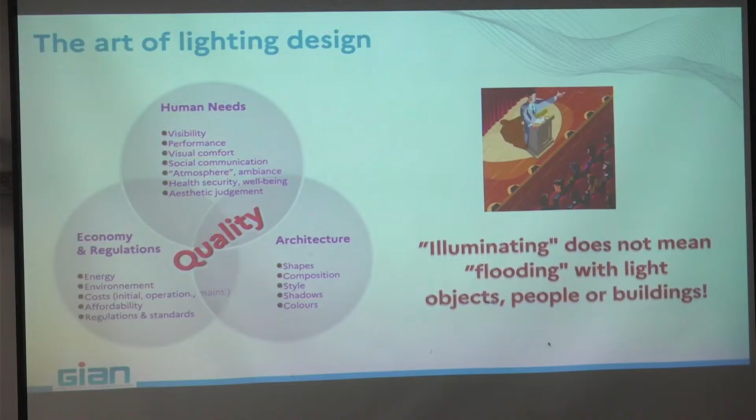It should be affordable and also take into account all the laws, regulations, standards, policies. Yesterday you had an overview, a very rapid overview of all that ecosystem.

And finally, this is interesting, of course, for people from architecture. And when I'm speaking here, architecture is not only building architectures, but it's also interior design. It's under the same title.

Then you have to take into account the shapes of the objects or buildings that you have to illuminate, the composition, what are the materials that are used to create those objects, the style. You will not illuminate the same way a Hindu temple as an Orthodox or Catholic church, or, I don't know, a modern building, okay?

Shadows. Shadow is very important to give the impression of volume. And finally, of course, colors, okay?

You see, really, a lighting designer, a real lighting designer has to take into account all that beyond the technology. The technology is what offers the possibility to create a lighting system to the designer.

Lighting strategies—we're speaking here about indoor, and we stay with indoor. There are different lighting strategies. You can see here two different spaces: one working space, another more relaxing space at home. But in both cases, if the needs are different, you have some general things that are the same.

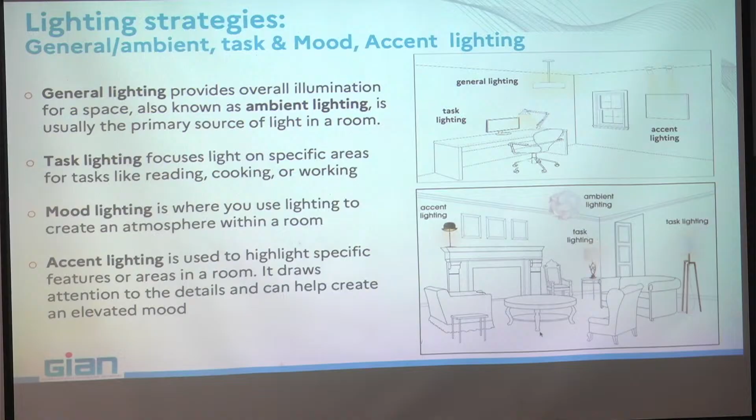Then you have mood lighting or accent lighting that is needed to highlight objects. Here is the case—this is accent lighting, it highlights the chimney here. This is the idea. And mood lighting, I don't have here any mood lighting, but this one can be considered as mood lighting or ambient lighting here. And here you have also accent lighting—you illuminate, for example, the whiteboard there in order to see it better.

Okay, this is the different types of lighting that you find in all spaces. And then there are different concepts for how to design the needed lighting.

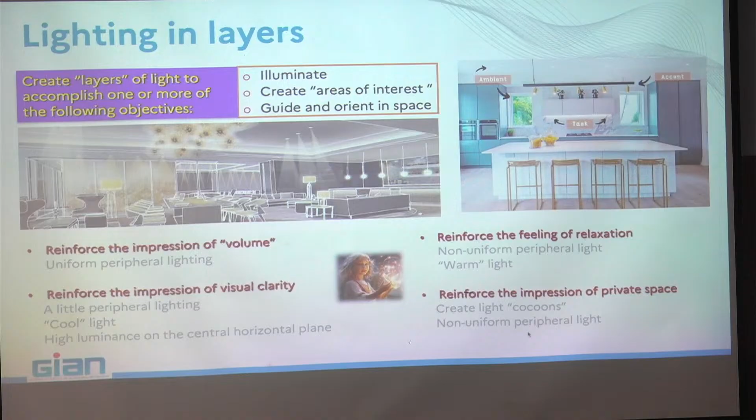This is an American concept, designing lighting in layers. I like that very much, but you have to be very careful because you can overspend energy if you don't take into account energy considerations. What is that? It's like an onion—create light up your space layer by layer.

There are three main objectives that the lighting system must take into account: illuminate, create areas of interest when necessary, and guide or orient in the space.

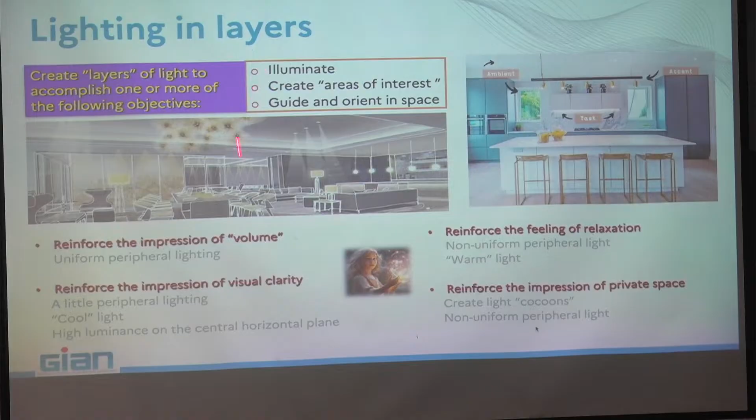You have those three functions, and in fact, when you want to light up this room, you decide what is the most important. You decide, for example, that illuminate, here is the case, is the most important. And then you start by designing the lighting to respond to all needs from general illumination.

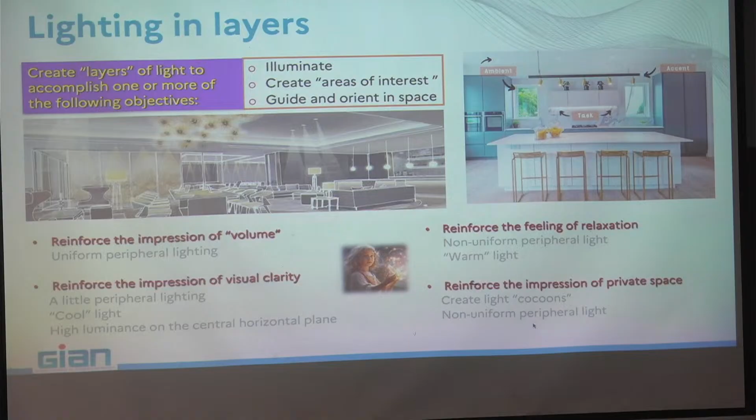Now, if you are in a corridor, there is a very important function beyond illuminate, which is to guide and orient in the space. Then you say the first layer is to light the corridor generally. Second important function to achieve is guide and orient, and then you have to add some additional lighting in order to obtain the orientation, or try to combine both. If you go to a retail store, of course, you need to illuminate.

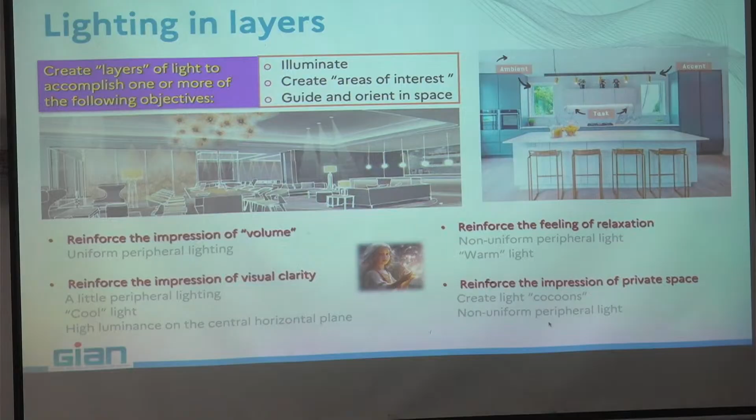This is one function, but you need to create a point of interest if you want to sell something specific, or in the opposite, if you want to sell everything, you need to avoid creating a point of interest. I will say maybe for a store, this one is maybe before illuminate. And also guide and orient in the space, of course, in that case is very important.

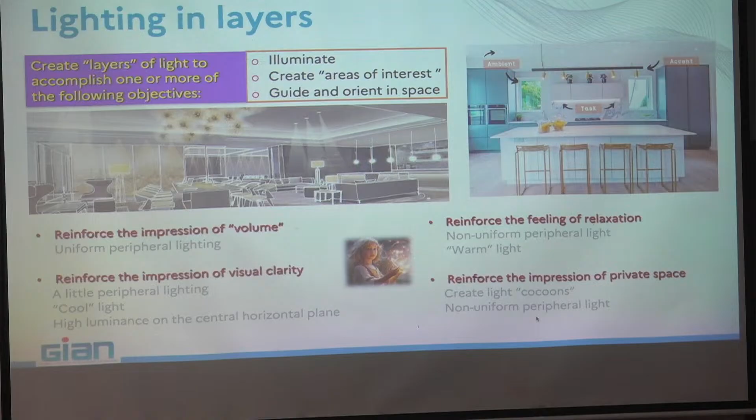You have to take each space and say, what is the priority that I want to give to each layer, and start by designing that layer, respecting all the constraints, and then add the next layers up to finalize your design. Why I said this can consume more energy: designing by layers, each time you add new lighting systems, new light sources, new power consumption.

If you don't take into account that, you can overspend. But the idea is you can combine and limit the new light sources for each layer, or you can play with the use time and reduce the lighting. For example, guide and orient in the space in a corridor should stay on in any case - this is emergency lighting, even if you have a problem inside the building. Then illuminate is necessary only when a person is present.

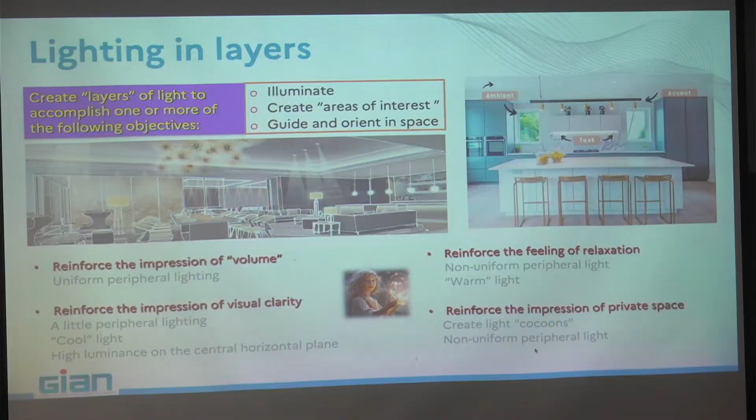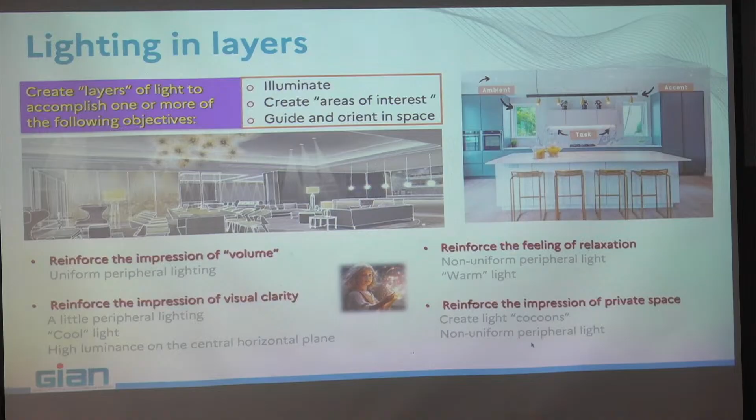Let's continue. Light has some magic power. This has the power to reinforce the volume. You feel to be in a larger volume when you have a uniform peripheral lighting. If I illuminate just the periphery here and you have less light in the middle, then I may create the impression that this room is larger.

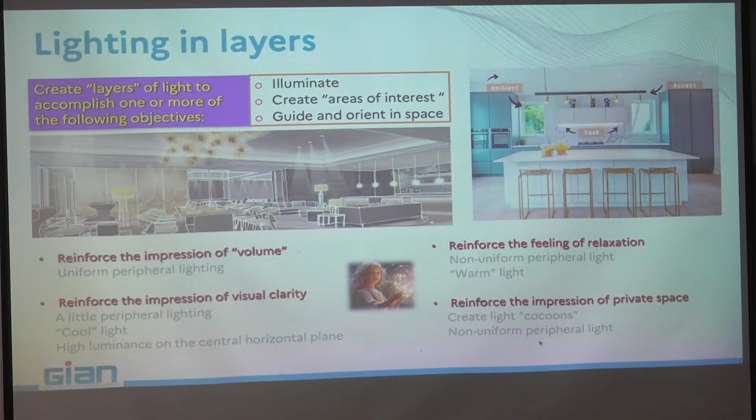You can reinforce the impression of visual clarity. This can be done by little peripheral lighting, cool light, and high luminance level in the central horizontal plane. For example, if you enter your office and you see your desk over illuminated and you have a little bit of light around, you create a light cocoon, and you have the impression that you see better in the central area. It is an impression, not always true.

You can reinforce the feeling of relaxation - that is for our homes, for hospitality premises - and you can do it by using non-uniform peripheral light and warm light. Warm light allows melatonin to increase, maybe not so rapidly, but makes you feel cool. And why warm feels cool - this is a nice opposition of words, but you have to understand that.

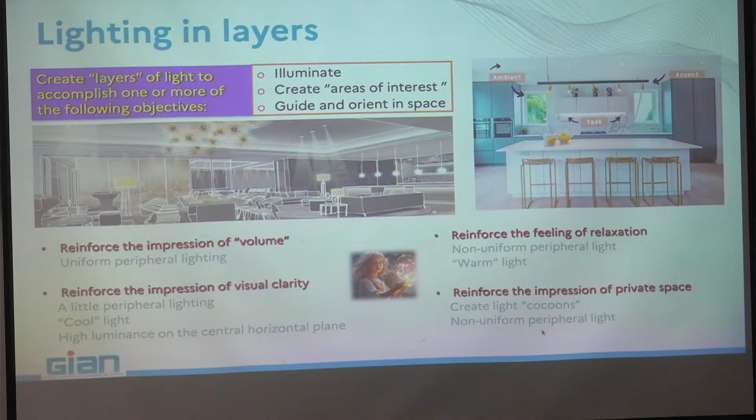Also, when you need shadows and not only uniform lighting - when you have very uniform lighting, you feel to be in a hospital room or even in a surgery room, and you don't want to have that.

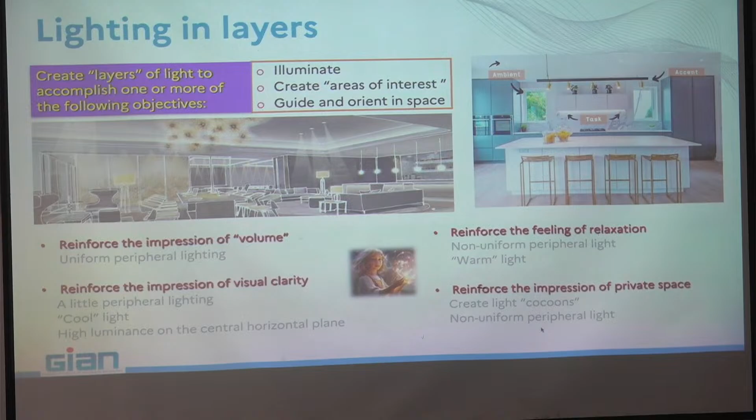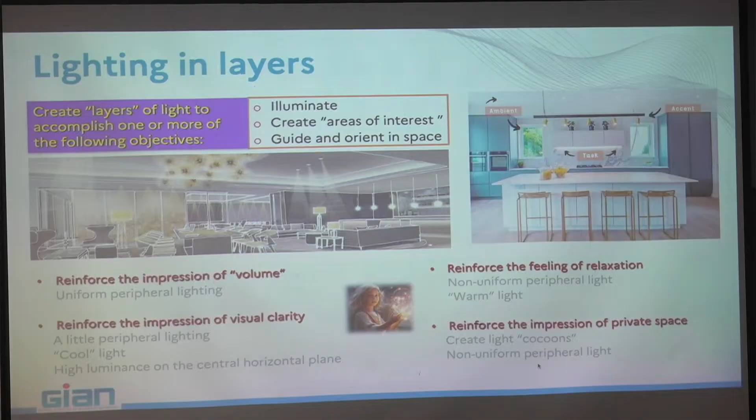Finally, reinforce the impression of private space. You can create, as I told you, light cocoons. If you are in a cubicle, or in an open space office, privacy is very difficult, but if in the late evening you over-illuminate each working area and don't give so much light around, you have the impression of being in your own light space, your own light cell, and you feel more comfortable.

But the contrast, I remind you, between the illuminated area and the other has not to be more than 10 times, because if it is more than that, if the surroundings are very dark, you will feel not very well, because you can always have the feeling that something wrong can happen inside the dark space, and you need to stay alert.

Okay, let's now try to apply all those principles, and that will take us maybe till 11. Let's look at what kind of lighting I need in different kinds of premises.

I will not speak about homes, because in homes you don't have any obligation. You do what you need, what you want, and no one can force you to change. The only thing important for housing is to use energy efficient products, in order to avoid paying your electricity invoice at a very high level. When you use energy efficient products, you reduce your invoice. You may pay a little more expensive for the lamps, but then you have a return on investment usually in the order of a few months.

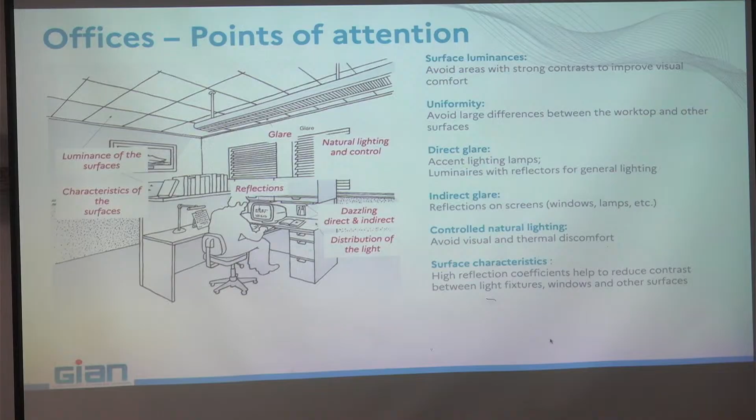You need to avoid any direct glare from windows, for example here, and you see the cubicle cuts the direct vision to the window, but also you have blinds that can be controlled by the system in order to avoid direct sunlight coming inside. And direct glare is the same.

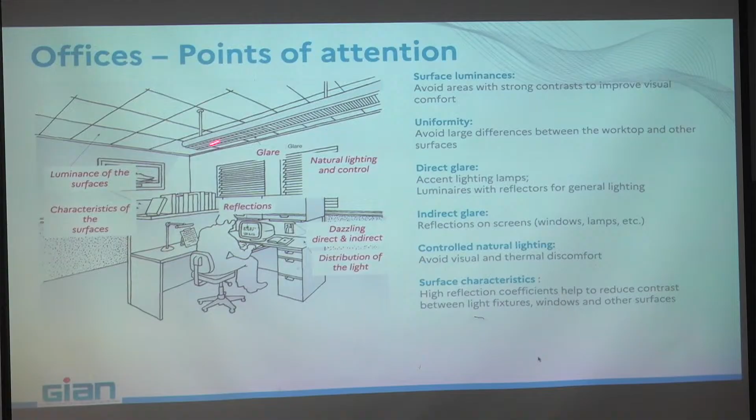You have to avoid, for example here, having reflection in the screen, and you see that the fixture above is behind the screen. This fixture can provoke direct glare, so you need to move your head to avoid creating direct glare.

You need to have control of lighting, natural lighting. I spoke about that, and everything here is important. You have to take into account if this is dazzling or not. What happened with the natural light? How much natural lighting do you have?

Maybe add some sensors in order to take into account the presence, the quantity of natural lighting, and so on. You also need to take into account the luminance going to the different surfaces and the characteristics of the surface, because this wood reflects a given quantity of light, this one another, that one another.

When you select the different materials or colors, you have to take into account that the light coming from above will be reflected by those materials, and this is what you will get in your eyes. The paper also has a different reflection coefficient.

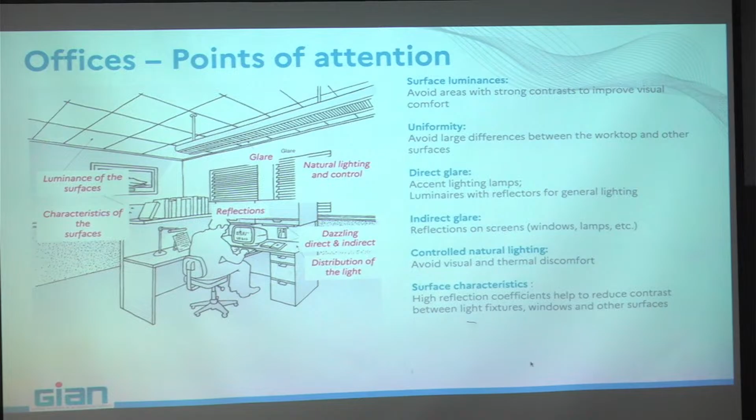In fact, you have to avoid high reflection coefficients, because if you have high reflection coefficient and specular reflection, as with a mirror, you create bright spots that can attract your attention, or in extreme cases they can create glare.

Glare control. I remind you of this scheme. This is the more glaring fixture, for me it's that one. For you, most probably, it's that one, which is further from your line of sight, and you just need to move your eyes.

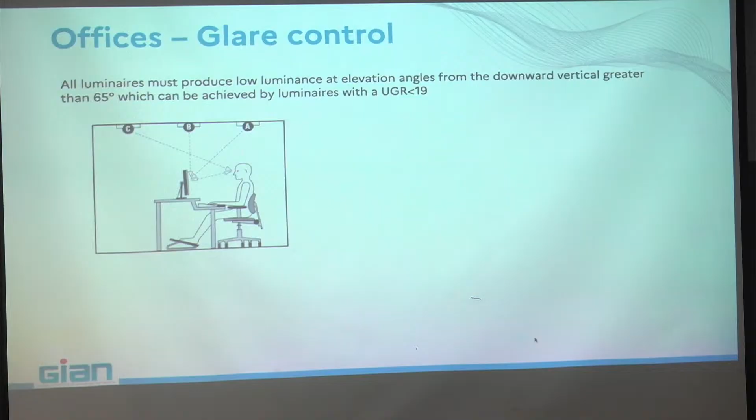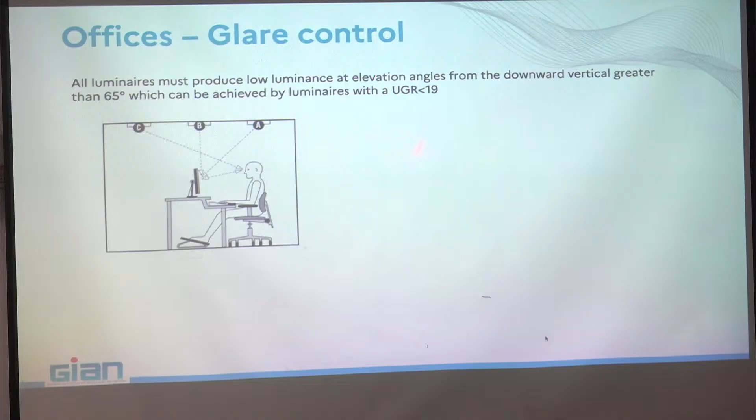This one I need to move my head more, and I don't know many people beyond lighting designers who are looking at the lamps. I'll explain how to calculate all this, looking in the catalogs of the lighting designers.

But here, in a general situation for office space, we consider having less than 19 UGR, Unified Glare Rating. One general rule is to avoid any kind of fixture if you don't have access to its characteristics, and avoid having any fixture at an angle higher than 65 degrees.

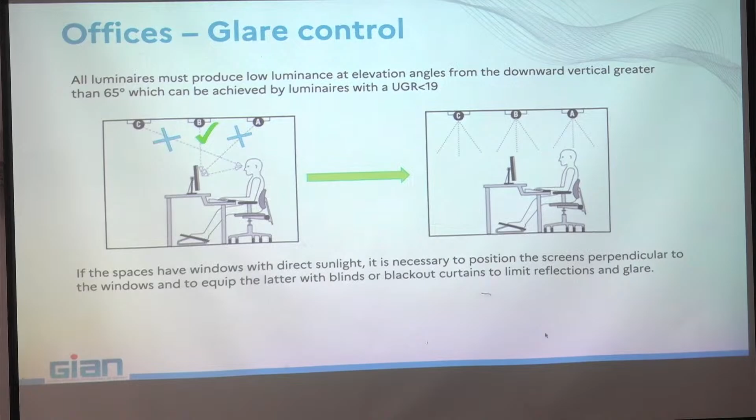This is doable if the room is rather small. If the room is very long, then it's another problem. But if you have a very long room, you have two possibilities: either you put the desk following the depth, or following the larger part of the room, and you have to design even the position of the desk if you cannot play with the lighting system.

Let's go now to educational premises, schools, universities, and things like that. I remind you that for protection index, IP index, there is clearly a distinction between kindergartens and all the remaining, because the kids, young kids before 6 years old, may have special needs to protect.

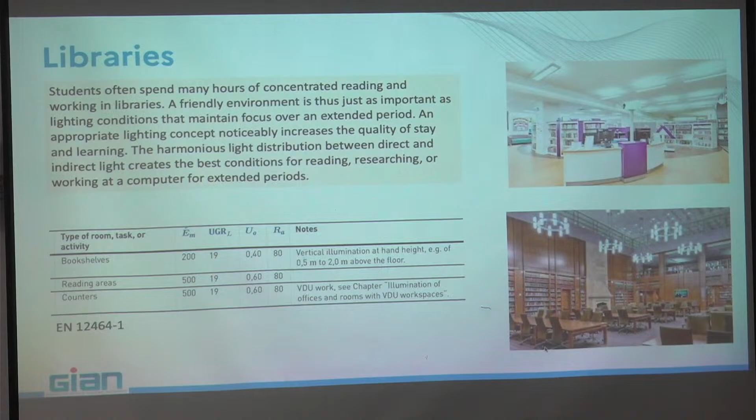Also here you have the books. If they are modern books, it's okay. If they are old books, they don't like exposure to a lot of daylight or aggressive light with UV or infrared. And of course, if you have a fire, books are flammable, which means you need fixtures that can withstand a potential fire inside a library.

Hospitals, as I told you from the beginning, are much more complicated because you have different spaces: doctor office, waiting areas, bathrooms, libraries, first aid, corridors, kitchens, laboratories, operating rooms, dentistry rooms, maternity wards, patient rooms, and much more. Each time you have a different population concerned—only the doctors, nurses and such are employees. All the others are users, and they have special needs because, concerning the different types of illness being treated there, you need to take that into account.

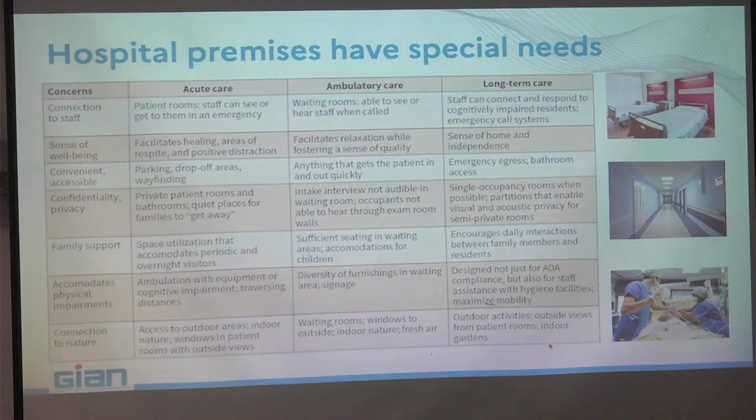Operating rooms are very special, because surgeons have to see very well what they are doing, in a very small area. The lights specific for the surgical room are not general lighting, it's task lighting, and the surgeon can move it, focalize it where he wants. In a spot of 20 centimeters, you may have up to 20,000 lux, because the surgeon has to see exactly what he is doing, especially if he wears lenses to see the details.

Today also, sometimes they have to look at the screen, look all around, you have to take that into account. But it's not unusual to need 20,000 lux, and it's funny, but as those lights are usually coming from behind, a lot of surgeons complain of having baldness problems, because they have very strong light hitting their head, which may affect the quantity of hair. But they need such quantity of light—for me it's not really useful, but they learn to do it like that.

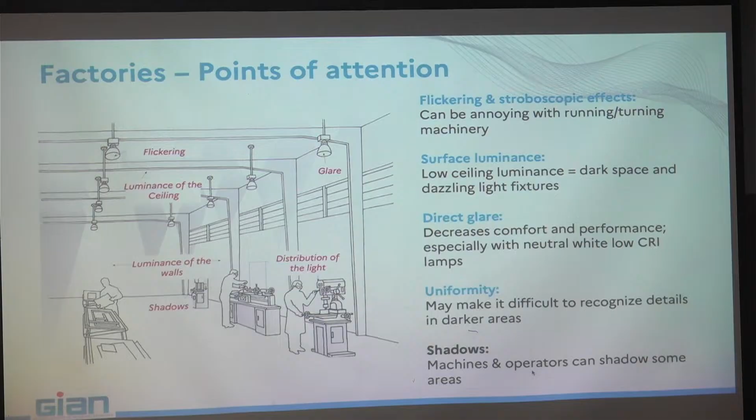There are some points of attention common to all these spaces. First, you need absolutely to avoid flicker, because flicker, if you have moving or rotating parts, can generate stroboscopic effects. If something is rotating, and your light flickers at the same frequency, you can perceive the object as stationary. And if you put your hand inside, it could be a big problem.

Imagine journal printing premises. You have big factories with rotating parts. If you don't see that the thing is rotating and you go to take a part of the journal and you enter in, you will go out from the other side kebab style. It is better to avoid such problems.

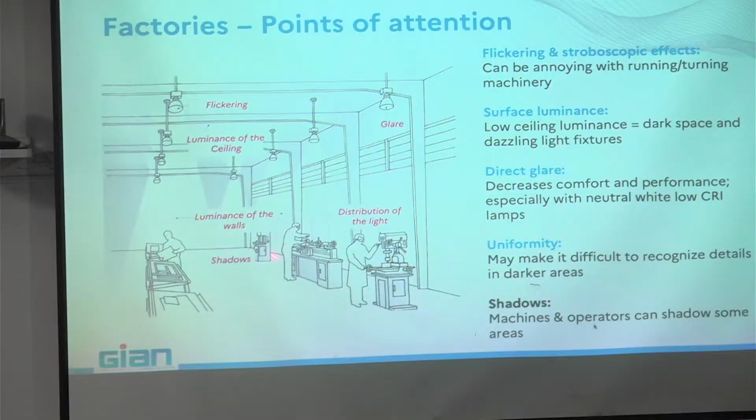You need to avoid dark space behind the luminaires, behind the fixtures, as the fixtures are deported from the roof. Then you have a part around the room that can be very dark, and this high contrast between the illuminated part and the dark part can create a not very acceptable feeling of the space.

Of course, you need to avoid direct glare. You see here, we don't have windows, we have what we call sky windows. They are higher in order to allow direct daylight to enter the place, but never at the height of the eyes of the worker.

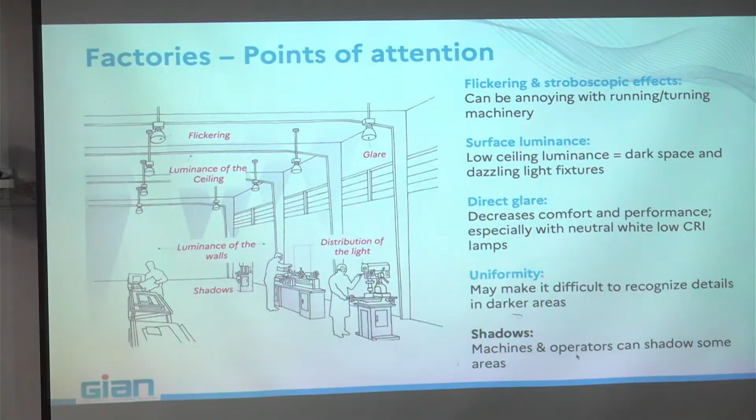You need uniformity, because it is difficult to recognize details when you have dark and very highly illuminated areas, and you need, of course, to avoid shadows. So: high uniformity, most probably high quantity of light, avoiding any glare from the windows or even from reflecting materials on the working areas of each employee.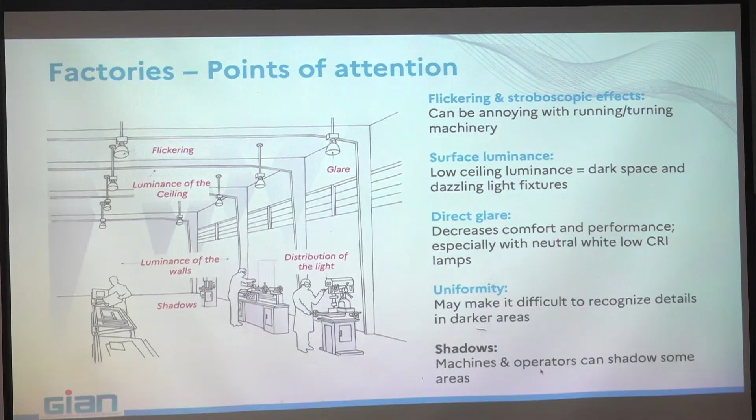For example, for color, it is important here—for cashier and circulation areas, no. Contrast, accent, highlight is very important here, not the opposite, and so on. Even inside the retail space, you have to organize the subspaces with different light quality and quantities.

There are some points of interest. First of all, the luminance level: usually you have high luminance in the premise, and you need high ceiling luminance to increase the uniformity. Ideally, if you can have access to skylight, it could be very nice because this is free, but in any case you have to put usually a very large number of fixtures inside the space in order to have uniform distribution of the horizontal luminance, or illuminance maybe.

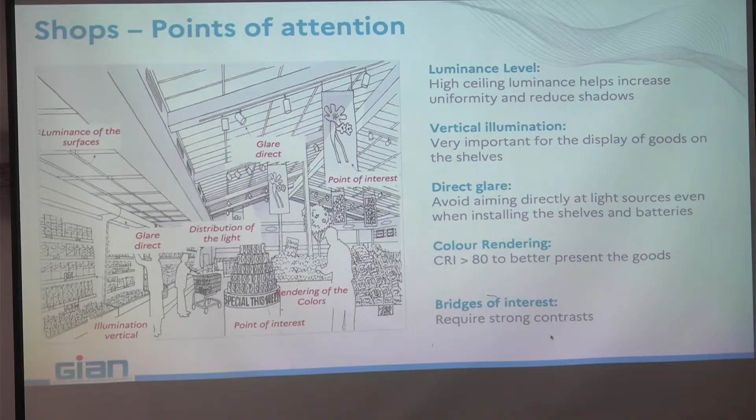Well, it depends, however, on what kind of product is promoted more and what less. You want to sell everything with the same preference for the customer, or highlight special promotional products.

Inside here you don't want a huge difference in contrast horizontally, because if you have a difference in horizontal contrast, you will attract people to the more lighted areas. This could be desirable, for example, if you want to create a point of interest because it's the special selling item of the week, and you need to attract people to buy that stuff.

Same thing, you need to take care of not only the horizontal but also the vertical, because the shelves are vertical, and you don't want to sell less of one product than another. If you have a different quantity of light vertically in the shelf, you will attract the eye of the customer to the more lighted part of the shelf, and this is not correct.

You need, of course, to avoid direct glare. Usually you don't have windows, you may have skylights or fixtures. Customers don't look at the fixtures, and when you have projectors, they are very seldom oriented to the height of the eyes of the consumers. But you may have glare from reflecting parts. If you have highly reflecting products, they may create glare, and you have to take this into account, especially if you highlight the product with projectors. You need good color rendering.

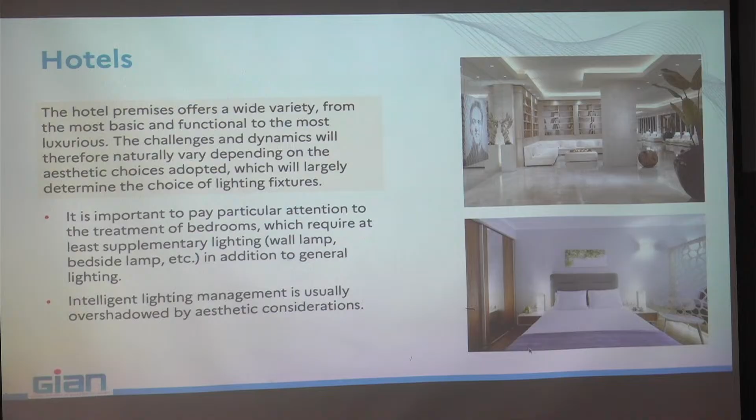You need inside the rooms relaxing ambience, and also the possibility to change the intensity of the light, the direction of the light, or what you light up, the color of the light, in order to create different ambience. There are indications on how to light up different spaces and what luminance level you need. Sometimes you may have glare problems inside the rooms, but glare is maybe not very important. Of course you don't want the light just in your front, but you need ambient lighting and task lighting. If general lighting is missing inside the room, it's not so problematic.

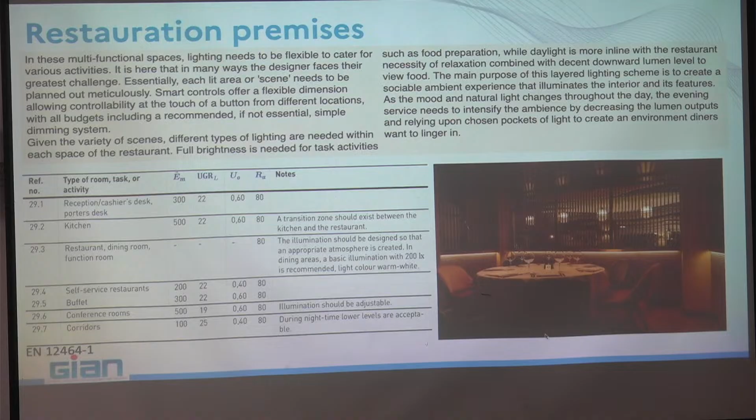Restaurant. Here we are in a completely different domain. In a restaurant you need to create ambience first. The waiter shows you your table with a small projector, which is the lamp of his phone. But you need to have, especially for high-level restaurants, a very cozy and warm ambience.

Remember the famous Kruithof diagram, which shows that you feel very comfortable if you have a very low illuminance level associated to a very low correlated color temperature. Illuminating that space with candles is fine because candles have very low color temperature and generate very low light. Okay, very low illuminance, and you are happy, except when you try to read the menu on the card. In that case you need task lighting to see a little better what is written there, and especially the price.

Okay, you have some indications on lighting the kitchen in the restaurant room, and I forgot something very important also: beyond the mood, there is also the color rendering.

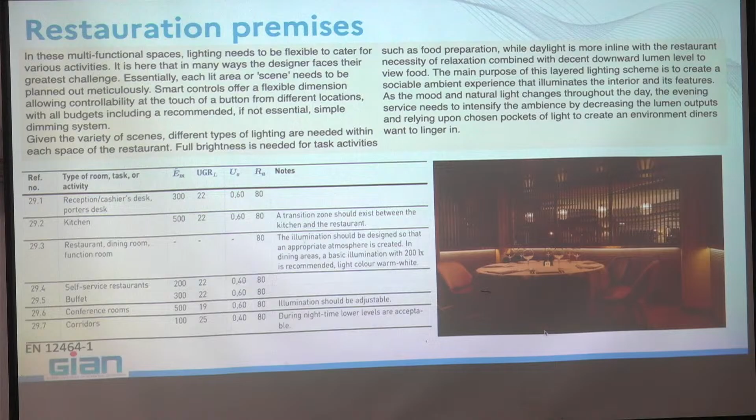You need to see very well what you're eating. If you illuminate a tomato with blue light, and you will see if it's a small tomato, you will think that it is something else.

If you don't see the right colors, you can be very influenced. There were some tests made around the 70s that showed that if you take a sample of people from different origins and tell them to refrain from eating for a full day, so they are starving, and then serve them, for example in the US, nice thick US steaks, illuminated with different colors. Some steaks illuminated with green light, and people said this steak's taste and also odor is not good, the steak is off. But it was exactly the same for all people.

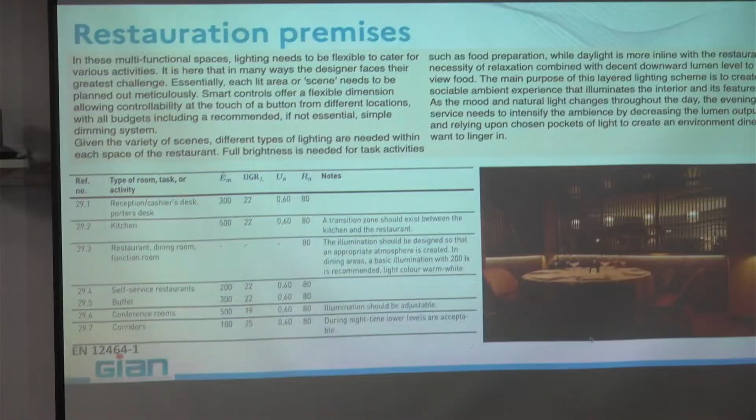The lighting can completely change other feelings like smell and taste. We call that... eyes and vision is a predominant sense that may affect the others. Yes, you can use today very high CRI LEDs to do that, with warm white it is doable.

CCT here is well below 3000. If you stay around the black body locus, with a small deviation allowed from the black body locus, you can define the CCT. The CCT here is around 3000, 2700 in this fixture here.

You can get CCTs with completely different spectral distributions. It is not an obligation to have a dominant spectrum in LED, in red, in order to have a low CCT. You can obtain the same CRI with different spectrums, and you can obtain the same CCT with different spectra also.

Today I remind you that CRI, we try to ban it. We want to create a different metric, which is the color fidelity index, based on the illumination of 99 different samples. The CRI was established with just 8 samples.

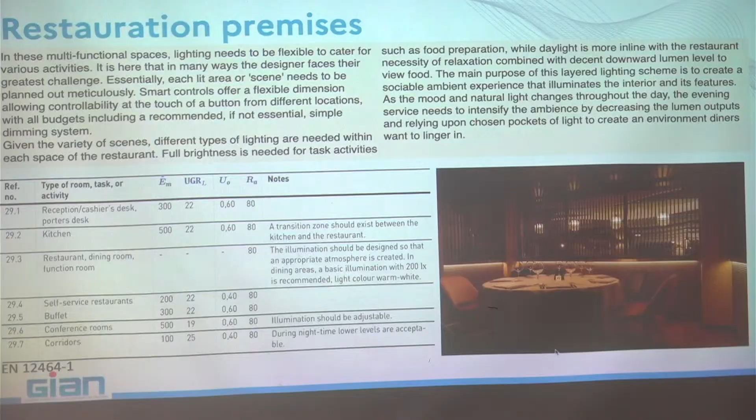Museums, this is also another interesting thing. In museums you need to see the different artworks. Usually at the beginning of the 20th century, museums were accessible only during the day, and all museums had roof openings to have daylight. Many museums at the beginning of the 20th century didn't have any artificial lighting system. Now we change that, and here you have some standard constraints.

You have to circulate around, you need to create some ambience, you need to illuminate the artifacts in order to create dramatic impressions and attract people to look at them. But you have to respect the artwork: you must not overheat it, no infrared, you must not have aggressive wavelengths, not so much blue and UV, because you can destroy the artwork. You must not over-illuminate very sensitive things, for example old manuscripts, with huge quantities of light, because sometimes the inks can be affected even by the visible part of the spectrum.

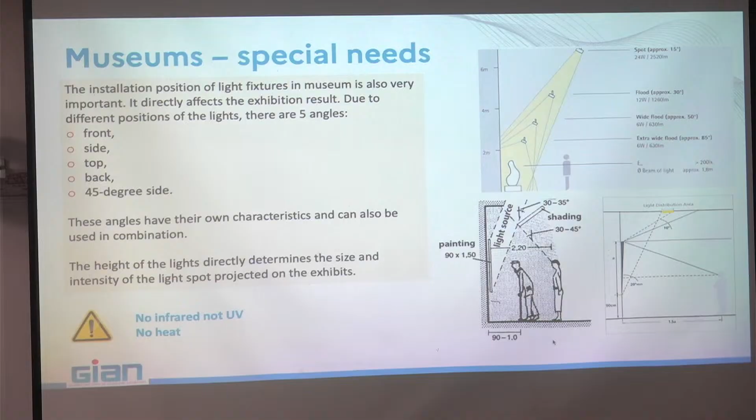Here, for example, you have some guides that tell you at what height you have to put the different type of projectors, how much light can arrive on this painting, in order to avoid glaring the people and see here correctly. I will not go into the details, but just remember: no infrared, no UV, no heat.

Sports, indoor sport practice, for example basketball, tennis, or what you need. Here you have different things: spectators, people playing, and of course here you have some problems. You see reflections from the light source in the ceiling. You have to avoid that because it is very reflecting. If you play basketball and you have glare, you don't see exactly what you are doing.

You also have the judges. You have a number of constraints, and they are very, very difficult. You have high ceilings, and you need a lot of light. Usually here LEDs started to be complicated because you need very high flux, and metal halide lamps that have very high flux can be more appropriate.

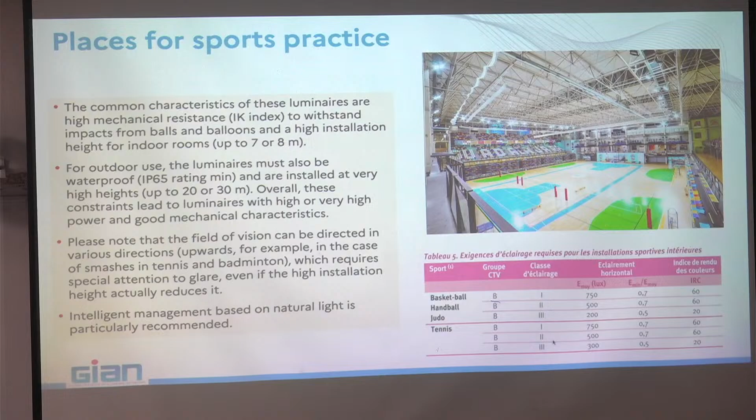If you use metal halide lamps and the current is cut for a few milliseconds, then you need more than 10 minutes to switch on the lights, and you have to think about security.

Same thing here for tennis, football stadiums - this is outdoor, but beyond all the constraints of big volumes, you have an additional constraint. If you are in a first category or national category football match, what happens is you may have TV recording the match. And today TV cameras are high resolution cameras at very high frequency, and they need excessively high illuminance on the grass.

To have a TV camera recording there for TV in real time, or even pre-recorded and displayed after, you need a minimum of 2000 lux on the grass. This is not a need for the players, but it's a need for the TV. And as TV is the main revenue for that kind of games, you respect the TV first, and then the other needs.

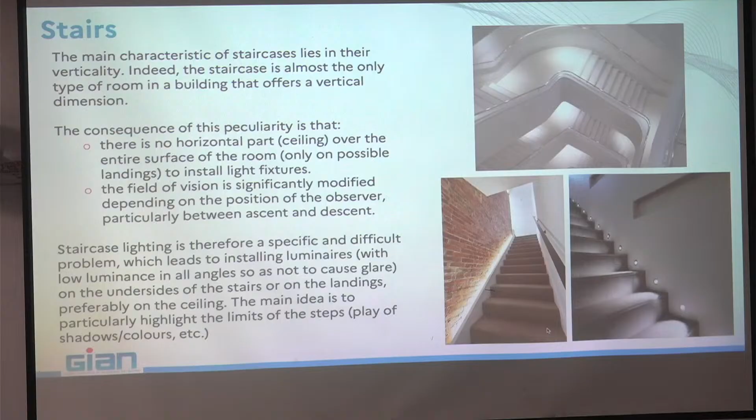Okay, stairs. Here the main thing is to guide, and also to illuminate. You see the guidance here, you illuminate also from above. Here you have a lot of non-uniformity, but this is not a problem because you are in the flat area. But here is not a good point, because non-uniformity in the stairs can be problematic.

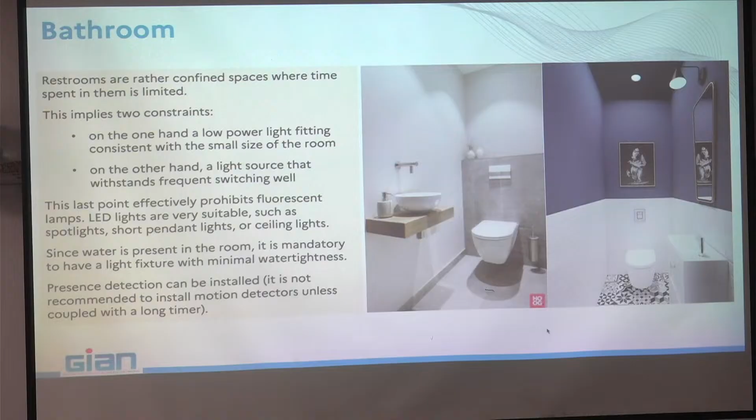Bathrooms, okay? The problem here is not what kind of light you want, but first you have a place that you don't need to illuminate in a permanent situation, and then another problem, which is no electricity nearby water. You need to define spaces, like here or around there, taking into account what class of electrical protection hazard you have to consider for your fixture or lamp.

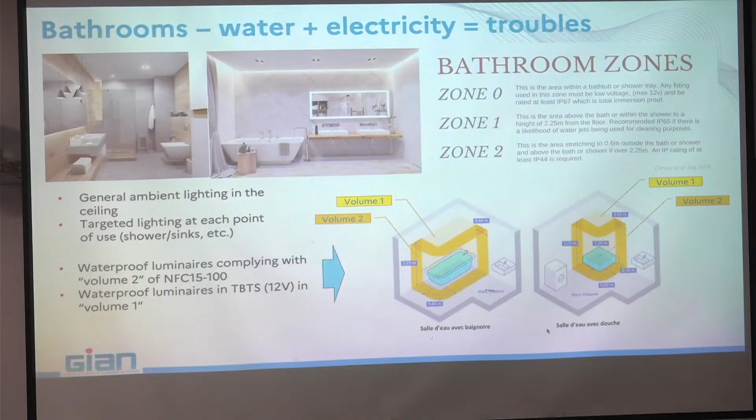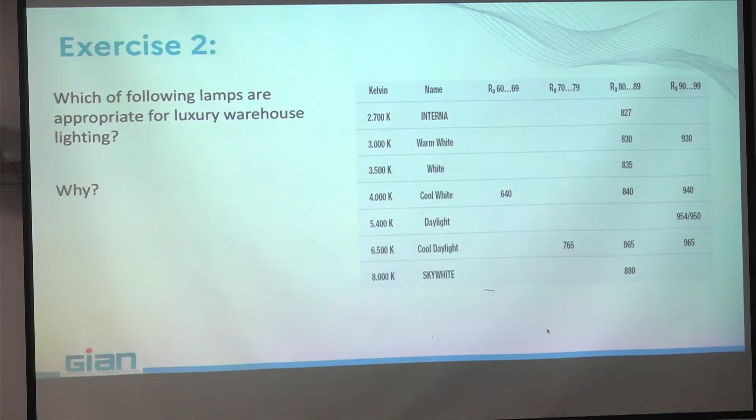For the following lamps, which one is appropriate for a luxury warehouse? You have the color rendering and the color temperature. Well, if you look here, the best option - sorry, normally I have the answer - but the best option here is to use warm white with high rendering index. Most probably that one, okay?

Okay, that is some of the questions that you have to ask when you want to start designing a lighting system. You have to look at what your needs are and how you illuminate that.